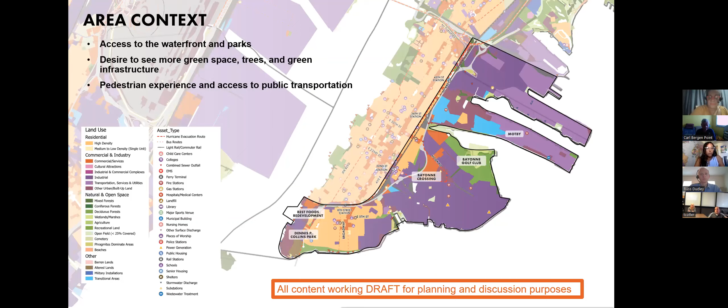As I said, we've discussed access to the waterfront and parks, the desire to see more green space, trees, and green infrastructure, and a pedestrian experience that gives us access to our public transportation system, which has really been developed with the growth of the light rail. I think that would start me out.

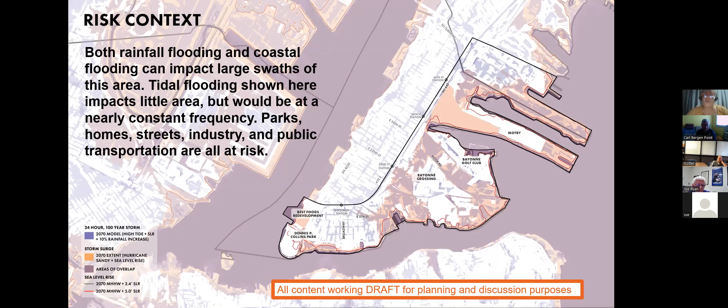Russ is going to talk through the scenarios and represent some of the projects already planned. We have great expertise on the line, so please feel free to pop in if there's anything missing. There are so many different things you can do, given the scale and magnitude of flooding that's possible, so we've divided different options into three categories based on solution complexity and who has the authority to implement now. It doesn't mean they could necessarily do it with existing funding and resources—they may still need state and federal funding—but the question is who can accomplish this.

Scenario 1 is things that entities could accomplish on their own—they could quarterback this by themselves. That would include things the city might be able to do on their own, what private individuals could do on their own, businesses, academia.

Scenario 2 covers options that can only be done in coordination with someone else—things the city and private sector would need to partner on together, where individuals or institutions would also need to be involved. Scenario 3 covers options that would require regional coordination in order to advance them.

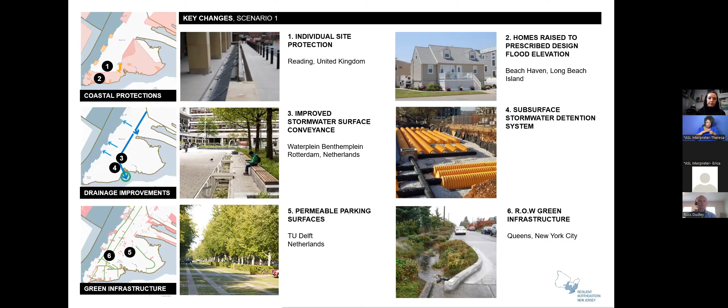There are some particular challenges with this. Certainly taking an individual site protection framework here for coastal protection leaves large areas unprotected, and especially getting access to critical facilities or emergency services is really challenging in those types of situations.

Also, from a drainage perspective, trying to find ways to separate stormwater and redirect it can be a really good opportunity for improving the capacity of your existing combined sewer system. But you do need to invest fairly significant dollars before you can really realize a lot of those benefits. And similarly with green infrastructure, you can make that investment, but if you're focused on the public right-of-way, you have to compete with other needs for that space, and that space can be limited.

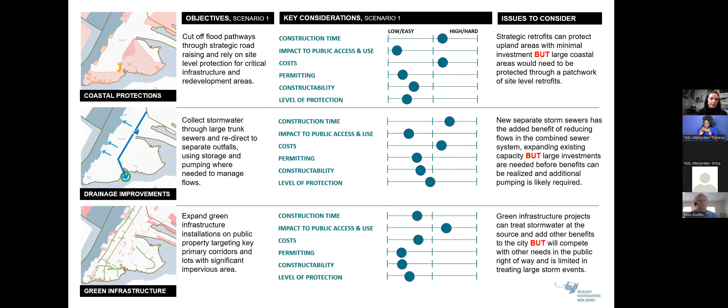And so you can also think of these non-physical solutions as sort of gap fillers, to address some of the things that the physical solutions are not quite getting to, but also things that will help improve resilience overall. So we've got policy measures here to protect areas that might be left outside of coastal alignments, where we're doing coastal alignment, potentially doing options for coastal alignment along right-of-ways, policy-based measures like trash cleanup and catch basin programs.

We've gotten a lot of feedback about the catch basins being clogged and the need for support in that area. Things like a municipal stormwater utility to help fund and implement resilience related measures, and then green infrastructure programs on public open space in order to help meet the goals of scenario 1.

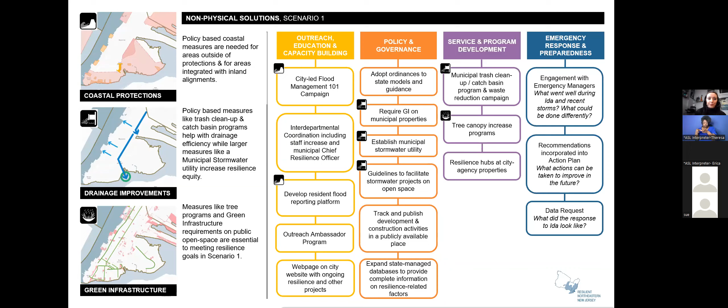So we'd love to get your feedback on scenario 1. What are some things that you really would like to see advance from scenario 1? Are there things that you would not want to see based on what you've seen so far? And then we also have some key questions for you to consider. These are relevant questions across all 3 scenarios, and you'll see these questions again and again because they help us to get kind of site specific.

And Carl, it sounds like you have a question. And please feel free. Oh, you just went on mute. You can come off. And then, so you know, when you speak, just let us know sort of your name. Feel free to introduce yourselves, because I know that we didn't do introductions at the beginning of this breakout.

That's okay. First of all, can you hear me? Yes, we can hear you. All right. I'm Carl Hetzel. I live on Cottage Street, and I'm a licensed engineer and a licensed planner for the state of New Jersey.

Great. And the only question I have right now is on the plan shown for the Cottage Street holding tank under the park. It appears that you're only showing a pink line from Hobart to East 5th Street on Cottage Street. I would think that you would need to have intercepts at least a block away, so that would be further up Cottage towards Orient, along Hobart to Evergreen, and along Hobart to East 5th Street. Has anybody decided on the final thing for that?

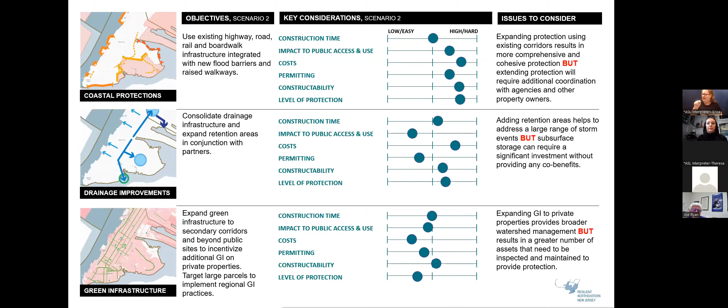Hi, Joe. I just wanted to understand the projection for drainage improvements. Is that suggesting that the water flow from the 34th Street light rail area would go southwards down Avenue E, with some of it draining into Constable Hook and some of it draining into the Kill Van Kull?

We're still exploring this, but the intention is to find opportunities to separate that stormwater and redirect it to separate outfalls where possible. On the north side, the intent is to separate that and redirect it to the MOTBY inlet. And on the south side, as you mentioned, try to separate that and outfall it separately so we can get it out of the combined sewer system.

Does that address your question, Joe? Yes, it's very important since the 34th Street area, East 34th Street area, was very hard hit on September 1st. We had about 3 feet of water just surging through the neighborhood. I had 7 feet of water in the basement.

There was a lot of damage done in the area, really the East 34th Street area and the 34th Street light rail station area. It's at the bottom of the hill, so the water flows downwards from uphill, and there was really nothing blocking the flooding at all. So if there's a way of increasing the outflow of the water into the Kill Van Kull, or some other place instead of into residential neighborhoods, that would be very helpful.

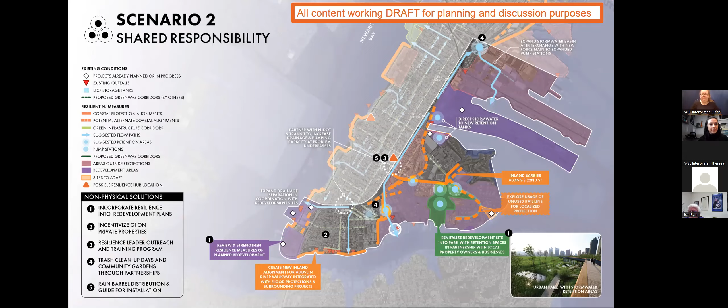From a non-physical solution perspective, you start to see how much more is possible when we partner with the private sector and community-based organizations. The advancements are deepened. For example, one of the things we've been hypothesizing, and also learning through our engagement processes, is that perhaps if we worked directly with community-based organizations and advocates from deaf and non-English speaking communities, we might be able to increase participation in efforts like this.

Also, in order to implement a flood overlay zone, that would require action on private properties. You have to get some level of support and engagement from the private sector, incentivizing green infrastructure on private properties. So that's expanding the number of places where we might be able to implement these projects, as Russ had mentioned before.

Resilience hubs is something we didn't talk too much about during the introductory presentation, but that has been a really big theme of the work we've done so far. We've heard a lot of feedback from members of the public that it can be challenging to know where to go and what resources might be available to them when there is a disaster. So this idea of resilience hubs is taking places that are community gathering points that members of the public might already go to, like schools or libraries, community centers, and having them do double duty when there is an emergency.

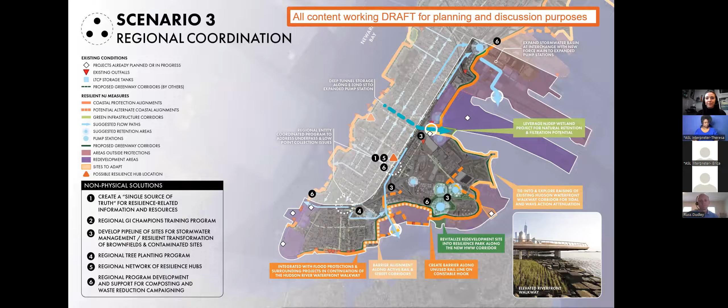So from a non-physical perspective, we really start to see transformative possibilities, coordinating at the regional level. Something that has come up a lot in conversations with state agencies is the potential use of the Resilient New Jersey platform long-term, expanding and refining how this program develops over time.

One of the things that makes the Resilient New Jersey program unique is that it's not only facilitating coordination across a broader geographic area, but on this call you have state agencies, municipal agencies, community members, community-based organizations, sometimes federal agencies. So what we're able to do is facilitate coordination both geographically and across multi-levels of governance and multiple scales: neighborhood, municipal, regional, and then much broader relevance.

And so leveraging the Resilient New Jersey program as a platform for engagement, to provide engagement around resilience-related issues that are relevant to the region.

We've heard a lot of feedback about the need for a single source of truth. People have complained about this idea of having portal proliferation syndrome, where they're hearing slightly different things from many different entities, making it very difficult to understand who's really the authority on any topic, and how they can trust what they're hearing. So providing a brand, so to speak, and a coordinating mechanism to deliver resources and messaging that people can really understand.

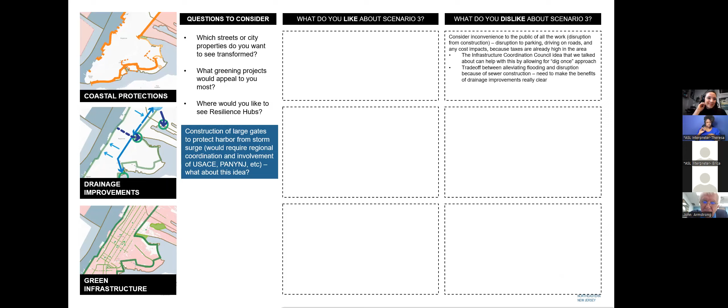I think Arcadis, yourselves, Carl, you have an interesting few slides online that discusses a surge barrier across the Verrazano Straits, Verrazano Narrows, beg your pardon. I think it's a very, very good idea. They did, you know, I'm from England originally. We did it all down the east coast of England. We had the London surge barrier, the one in Hull, one in Newcastle, basically to protect flooding. I think the idea of a barrier across the Verrazano Straits makes enormous sense.

Might have to include one or maybe two ship locks. That's the only problem, because you've got to get the ships through it somehow. But not impossible. It's not like it's that outrageous when you think of the cost of doing all these resiliency projects. One big project might be the perfect answer. You can go online, it's been discussed all over the place.